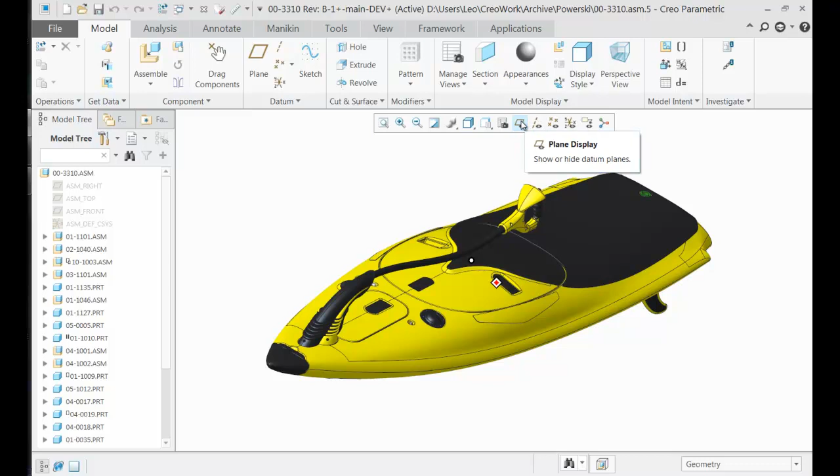Your skeleton is a modeling technique, which is great, but even then, if you don't have a handle on your layers, it's going to be difficult to manage the display—which is what we're talking about here for MBD—the display of pertinent data to the people who care about it. And so we all use these tools, which turn those things off: turn off the planes, turn off the axes, turn off the points, turn off the coordinate systems. And there's one more button that you probably leave off most of the time, and that's the annotation display button.

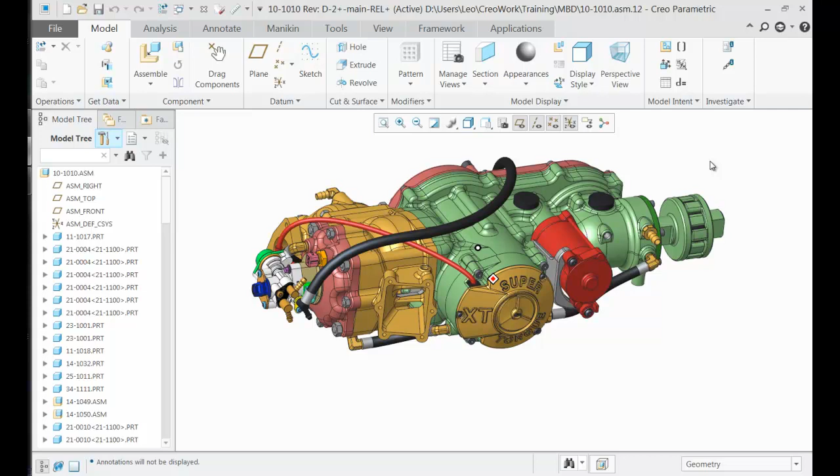One of the sub-assemblies in here is the engine. I was able to run every one of these parts and assemblies through a map key that would assign the appropriate entities, create the layers and assign the appropriate entities to all the layers, to where I could leave on the planes, the axes, and so on, and end up with a model tree at the assembly level that is reasonable.

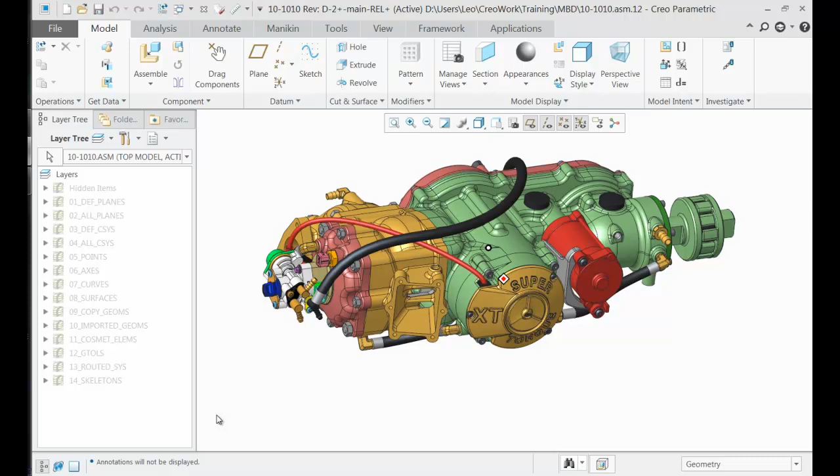That's number one. Get your layers under control to where they become useful.

Let's go down another level to the part level. So here is a part, and you'll recognize these annotations as holes—you probably saw them as holes before. That's the annotation that you guys have been using. When you place a hole, you get a free annotation, and you probably show them on your drawings right now. And we'll be using these, and luckily and happily, you won't need to delete them and recreate them to use them for your MBD.

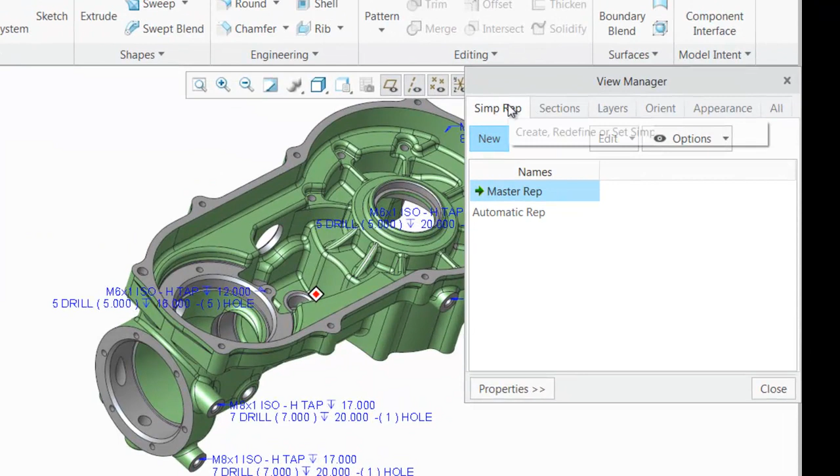We'll be talking about something called a combined state for the management of MBD. You've seen simplified rep management—that's where you manage your simplified reps, your parts and assemblies. You've seen your section management—that's where you manage your sections.

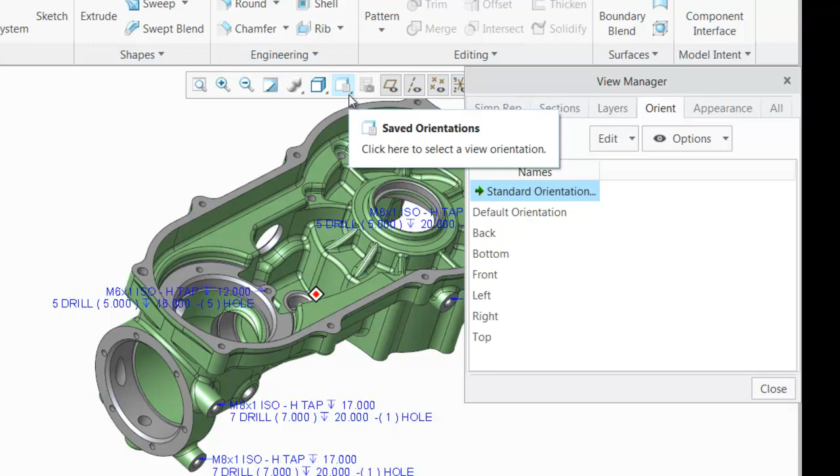There is also a Layer tab in the View Manager, an Orient tab in your Manager, an Appearance tab in your Manager, and an All tab in your Manager. You probably recognize on the Orient tab the views that you're commonly used to—those are the same views that are on the saved view, saved orientation drop-down that you used before: top, bottom, left, right, and so on. But you'll notice here that there is a Layers tab, an Appearance tab, and an All tab that you probably never mess with. So what are these things?

The All tab on your View Manager is the combo, or combination states. So let's make a combination state right now. We'll call this maybe 01_Annotations.

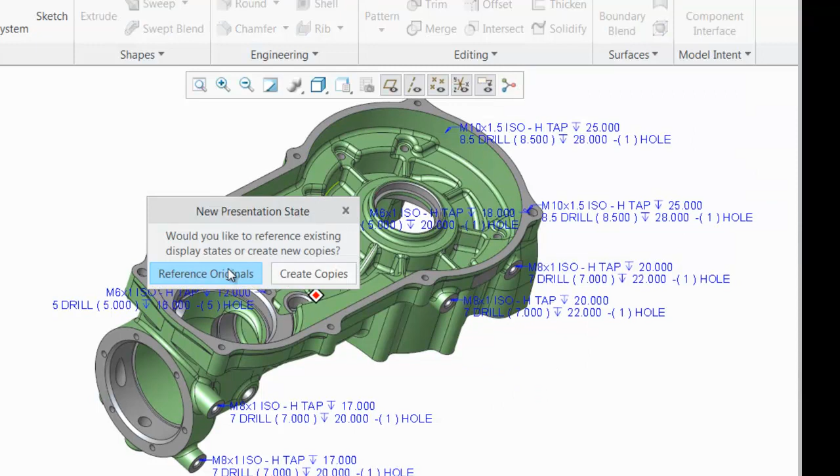We'll just go with the default for now. So now I've created a new combination state. It's on the All tab, I know, but it's a combination state, so get used to the terminology. And I close that - do you see a difference? Zero difference. Nothing's happened. Nothing at all.

So there's another thing you need to look at on the View Manager All tab. Down here you'll see Display Combined Views. And if you click this and turn it on - it's not on by default, but it can be with a config option - you'll notice underneath the main window there are tabs.

These are the tabs for your combination states. So, View Manager, All tab - you define your combo states, and then Display Combined Views shows the combo states, and those will then be shown at the bottom of your main window.

In Creo 4, you'll also have the choice of whether or not your combined views are shown as tabs or published. This is new in 4, where you get to choose. So you can have combination states that don't get published and combination states that don't have a tab.

When you publish a model that has combined states configured to publish, it creates a data set with a PVZ extension - that's the Creo View extension. The combined states are included in that data set.

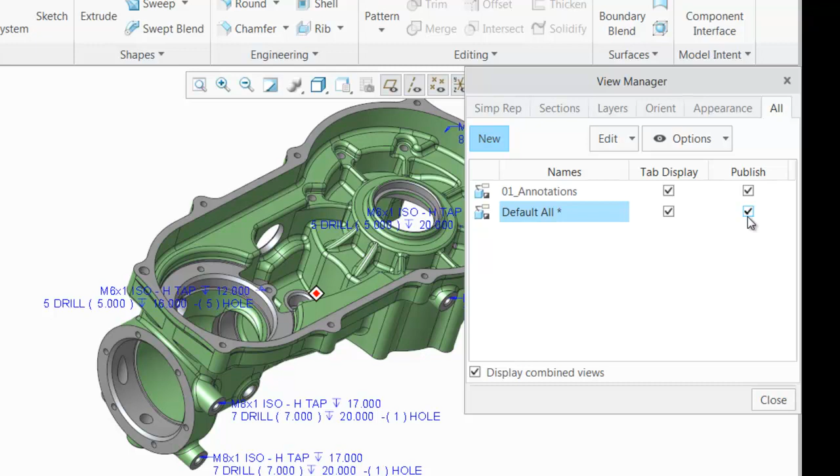All right. With Display Combined Views turned on, you'll notice there are tabs on the bottom here.

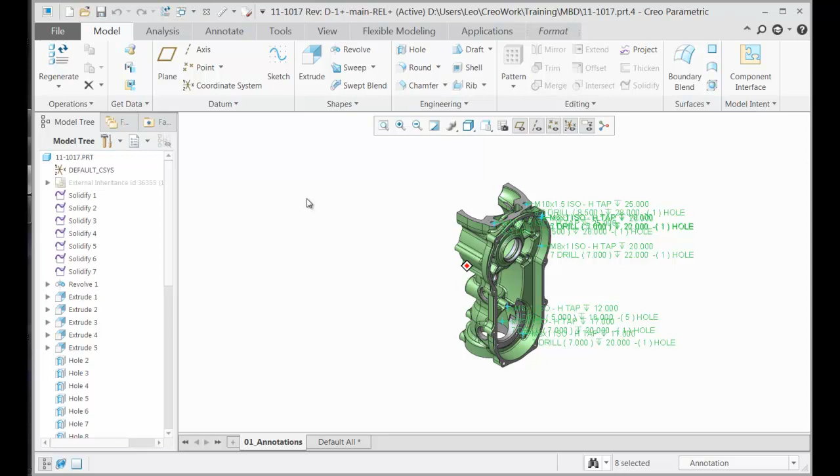When I'm on a combined state like I have here, I can change my filters to annotation and make a box and just grab them all. And if I right-click, hold, and assign - whoops, I have to be on the Annotate tab - then I can assign these annotations to this combined state.

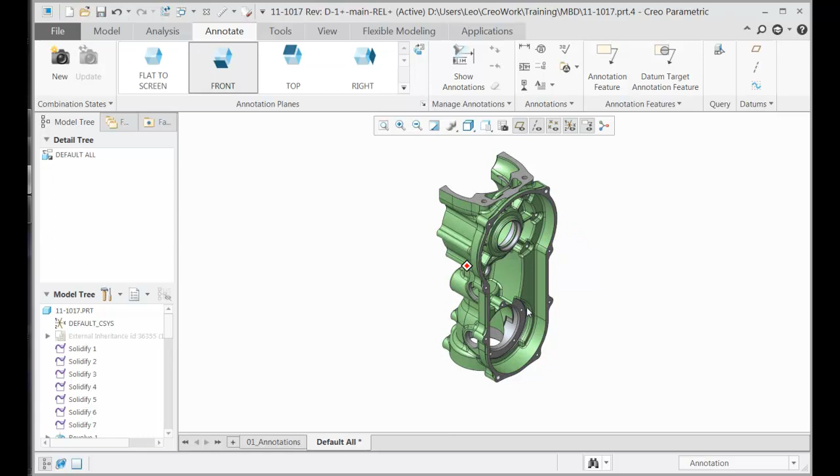Notice a lot of things changed here. Now what's the difference? So now when I go to the default all, notice that they're not there anymore. And the annotation tab does have them.

Something else I want to point out - when I go back to my assembly, it's kind of hard to say because there are so many other parts with holes in them, but they're not shown here any longer, you see. So that's cleaning up your subsequent assemblies very, very quickly.

You follow that? Now, a lot of you are currently hiding your holes, right? Just hide them, I don't want to see it - I might show it on the drawing, I might not. But this becomes an effective way to not have to hide them.

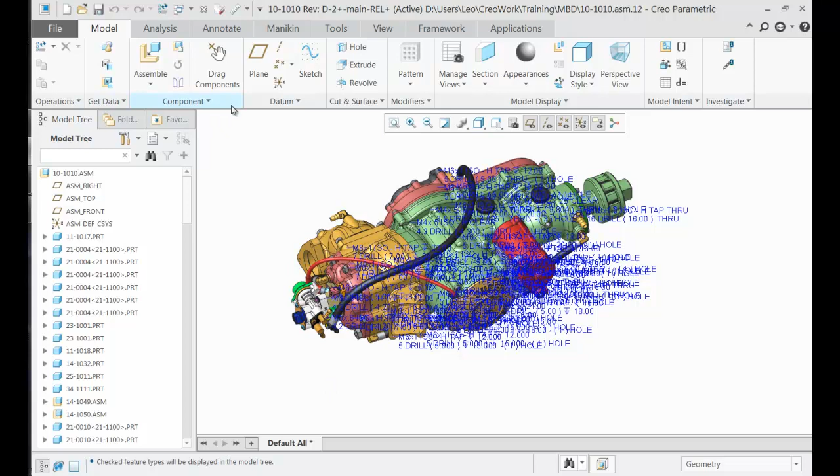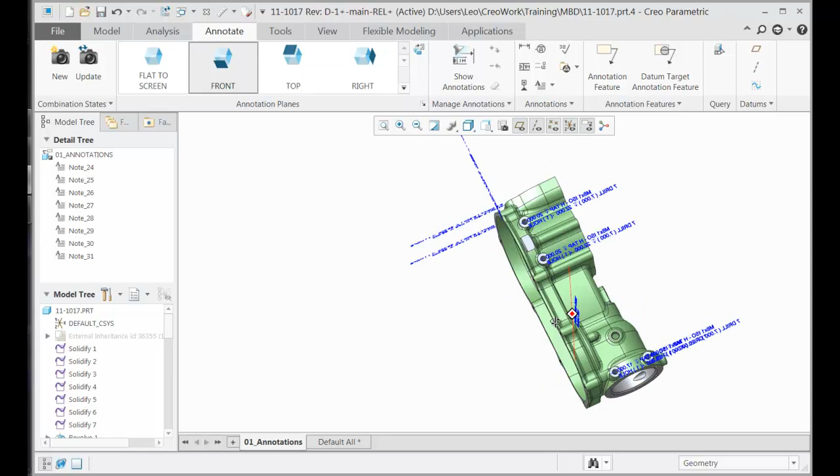Something else you'll notice is they're not floating and spinning around anymore. You notice that they now are on planes, because the hole has a reference plane that the hole is located on, and the note is then oriented with respect to that plane. This is an important aspect having to do with MBD.

File, Prepare, Model Properties. You guys go here to change what? Material, right? You go here to change material a lot. What else do you change here? Units, accuracy, right - all those things. At the bottom of this list...

You'll see detail options. Does that ring a bell? Where do you see detail options anywhere else? Drawing, right? And what does this look like? That's your drawing, what? DTL.

So yeah, this is where you're going to start to establish what you want your model-based definition annotations to look like - leader lines, arrowheads, offsets, text size, and the like.

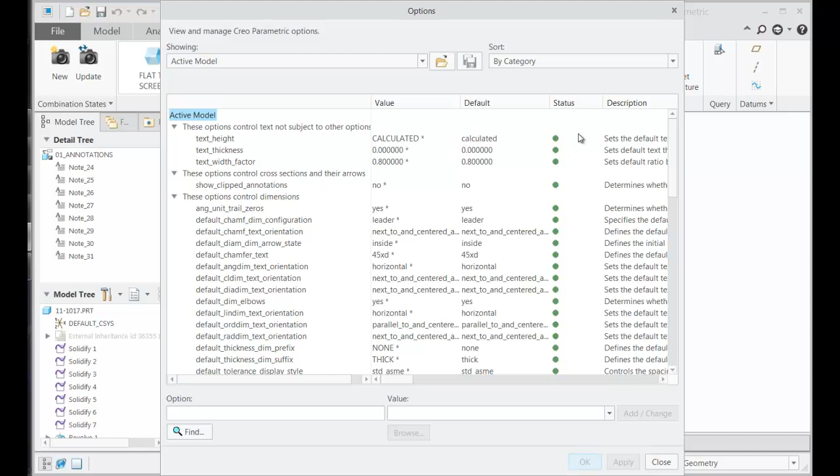And just like a DTL on a drawing, when does the DTL get accessed? On creation. So when you make a new drawing, the new drawing grabs your DTL and copies all that data into its own DTL. Changing your standard DTL doesn't affect your drawing from then on - you've got to affect that drawing, if you want to change it, in its own DTL.

Same thing applies here. So if your start part hasn't got a changed DTL in it, you'll be continually changing the DTLs - you with me on that? Because it doesn't access your standard DTL but once, on creation. And when you create a new part, when does it look?

When was that start part created? The start part or the start drawing? Start part. This is all part stuff, not drawing.

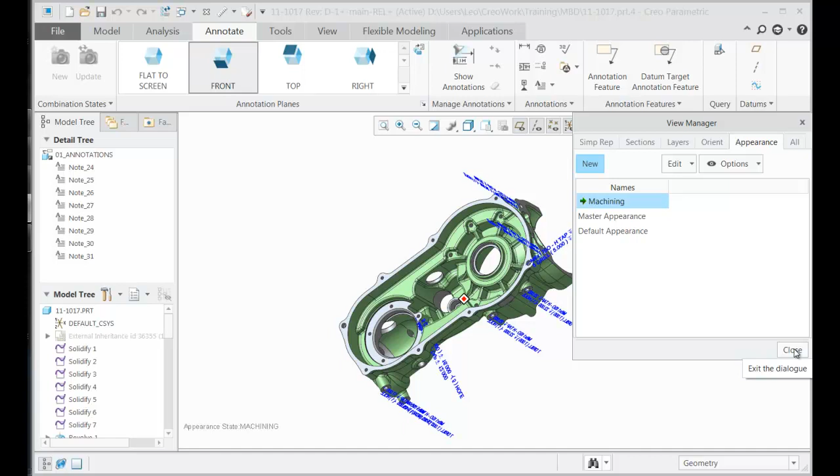Let's make a new appearance. We'll call it, well actually let's do it this way. Let's call it the machining appearance. Now what might we want to do to show a machining appearance? We might want to show the cut or manufacture, the cut surfaces, right?

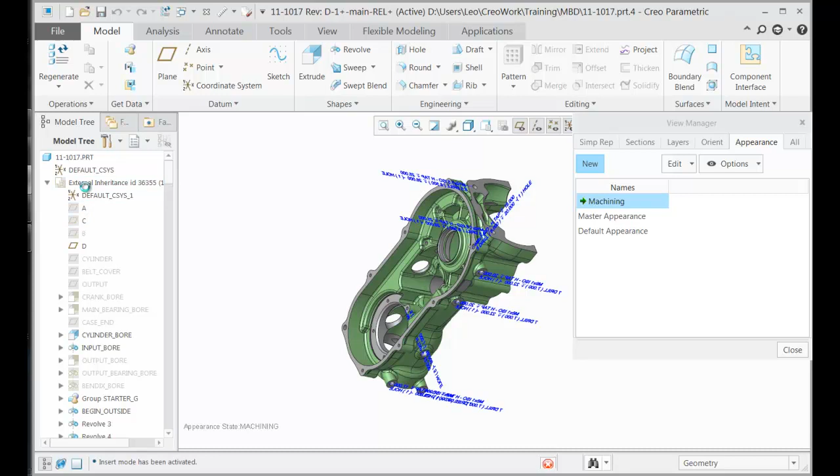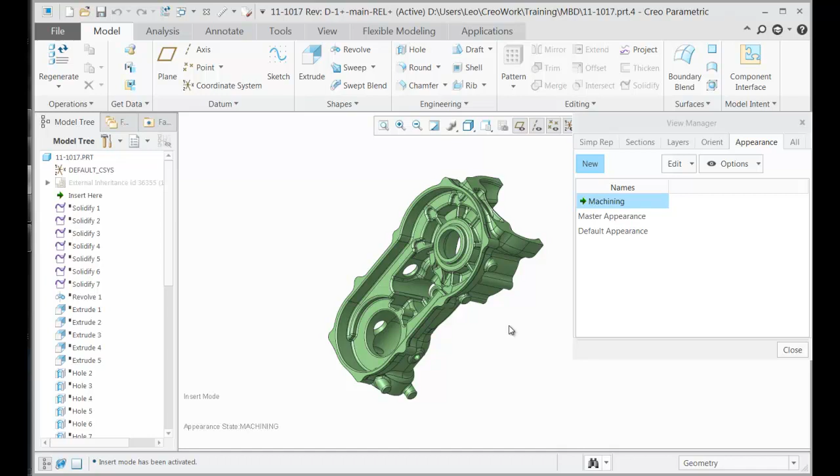Take the insert and move it all the way up to just after the first inheritance feature. Now the way this model was actually made is there is another model that drives it like a skeleton, and then this one is where the cuts are applied only. So that's what I have here, an inheritance feature that brings in the as-cast version. So this is as cast.

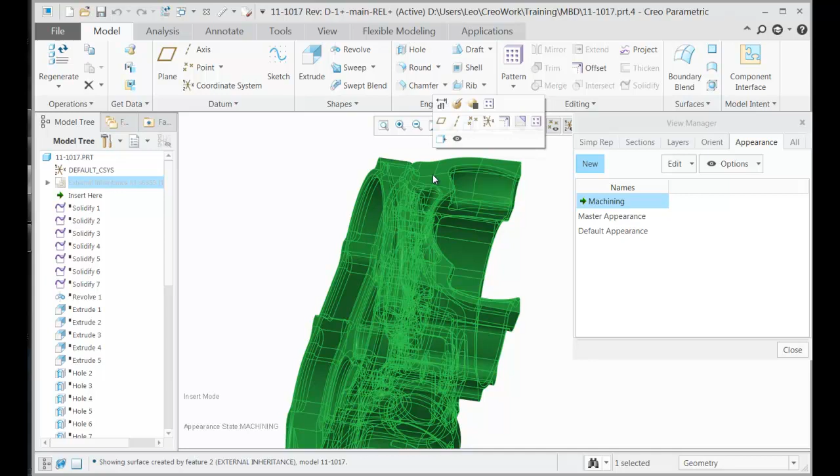If I pick a surface, hold the shift key down, move the mouse a little bit, click the same surface and release the shift key, that is the seed and boundary selection technique that picks all the surfaces of the entire model. So I've got all the surfaces, and if I go to my appearances and assign a glass appearance, now all the surfaces have a glass appearance.

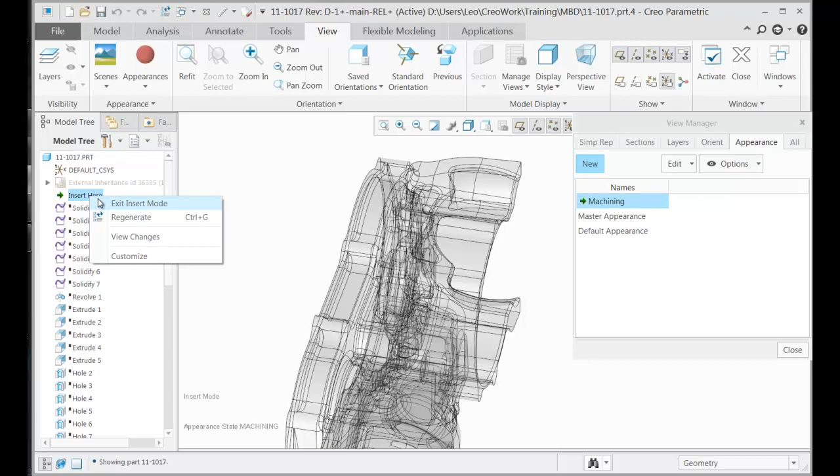And if I say choose red for the part, what happens now with every newly created surface, they get red.

So this would be a good way to show machined operations. Let's say you have a model that is mostly or entirely as-cast to a certain point, and then you have your machining operations after that. If you color all the surfaces before the machining operations occur, they automatically get the color of the model, whereas all the other surfaces get the one chosen, which is what we've done here.

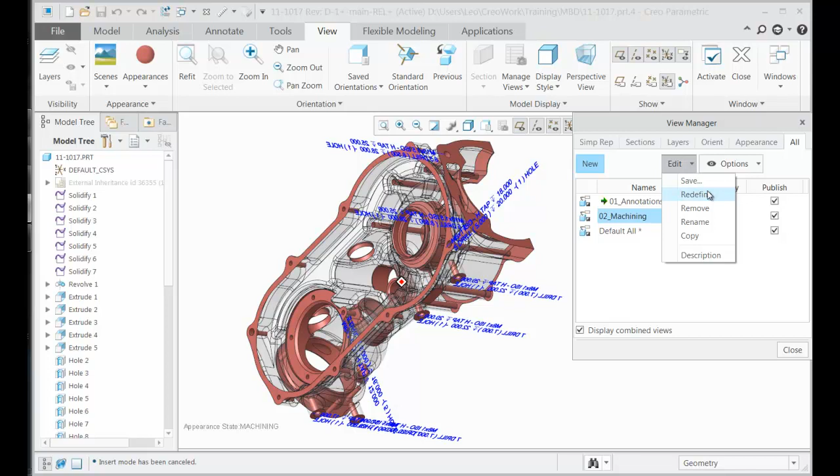So if I go to my All tab or my Combo State tab and make a new one, we'll call this one Machining. The tabs are alphanumeric sorted, so you might want to put a number in front of them. We'll reference the originals again, and then I'm going to edit the definition of this newly created combination state, or redefine it.

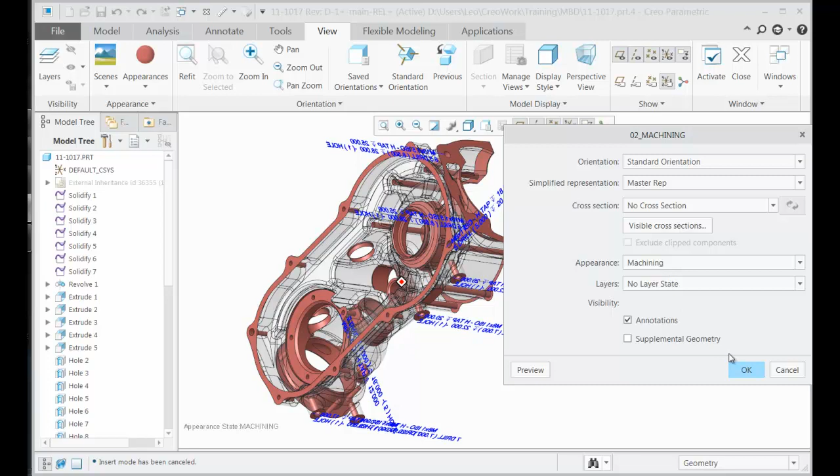So you'll notice here that you can assign to your combo states things associated with your orientation, representation, cross-section or not, and appearance. Notice here I can choose to have the machining appearance on this tab. So I now have an 02 machining, and if I go to my annotations, you see how it changes color.

And the annotations aren't shown here. Let's make another tab where we might call this one, let's make it say 03 underscore revision.

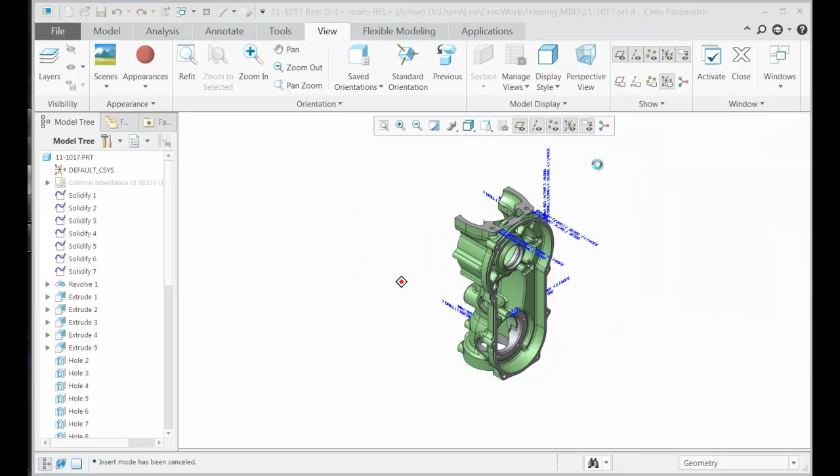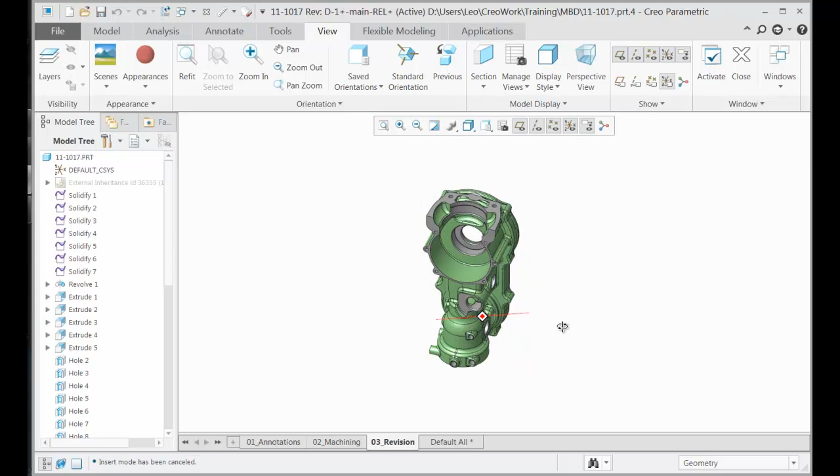And so what might you put in a combo state for revisions? Well, what changed in the last revision? You might want to put the dimensions of the thing that you changed. You might want to put the feature or highlight the feature that was just added in this latest revision. For example, what if we come up with an example? How about this? We might have moved this drain port.

This is for the oil to come out of this particular thing. So we'll change a view and we'll highlight this particular feature. What might be some of the ways that we could highlight it? One would be to create a zoomed up view of this. So let's look at that.

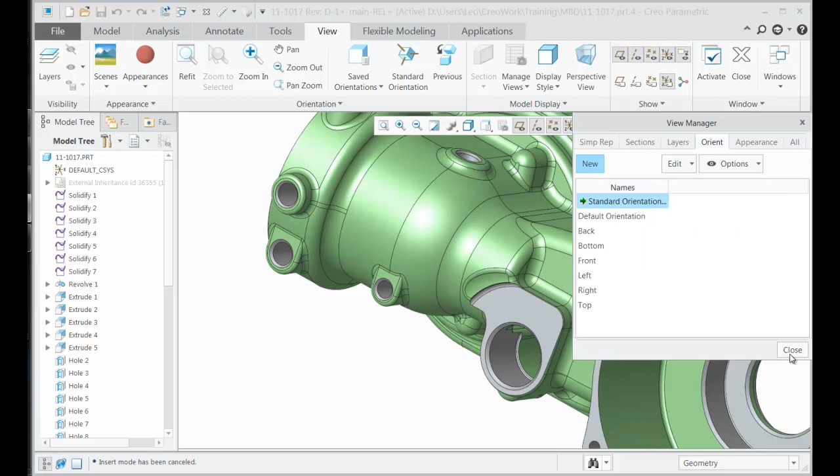Go to the orientation, or actually let's do it this way. You've done this before, where you've reoriented, and we'll call this maybe ISO revision. So if I go to my revision tab...

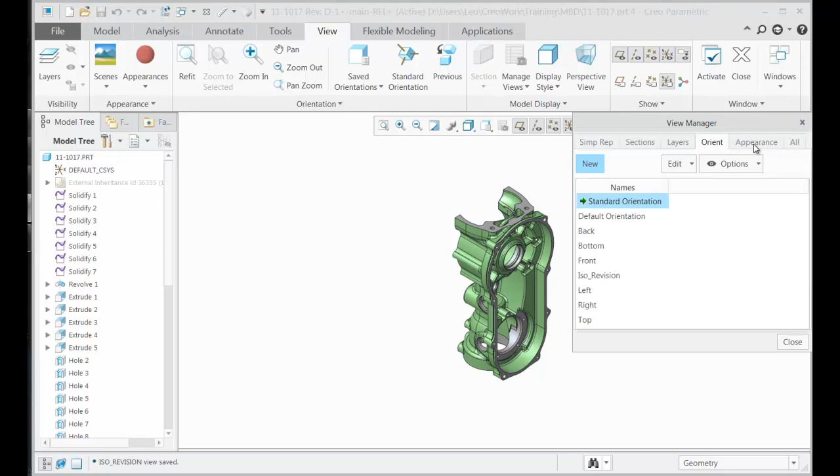I want it to come up to that revision view. Where do I set that? Alt tab revision, I want to redefine the orientation to be ISO revision. So now I've got a revision tab that highlights the revision. And of course I might want to do an appearance that puts some colors on it or what have you.

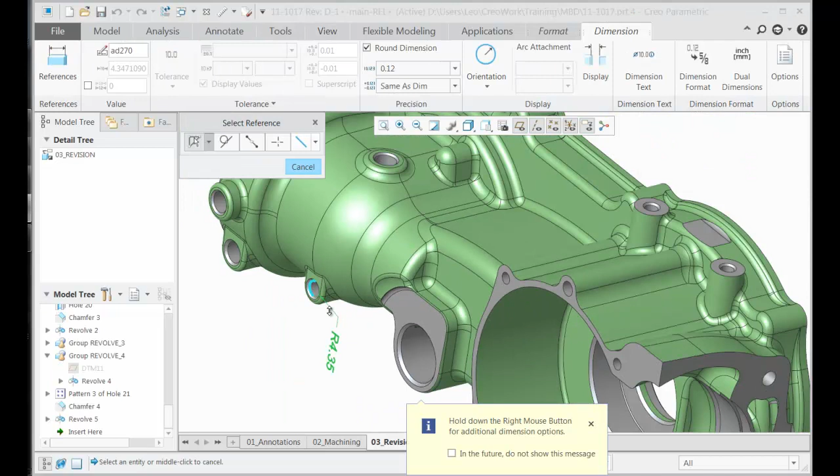I also might want to show dimensions. Okay, so this is a way to get a dimension on there. There's lots of ways to change its orientation for presentation purposes and so on.

So now when I go to my machining tab, it looks like that. When I go to my annotations tab, it looks like that. When I go to my revision tab, it looks like that, zoomed up, showing the dimension. What else might I want on here?

Now what if I put a note on the left plane? It would be on the left plane, but what if I put this note flat to screen? What kind of behavior do I get then? Check this out. If I say give me a note, and I put it right here, and I could type revision description, or what about rev space ampersand PRO_I underscore revision. Those of you who are familiar with Intralink know that that is the revision parameter name.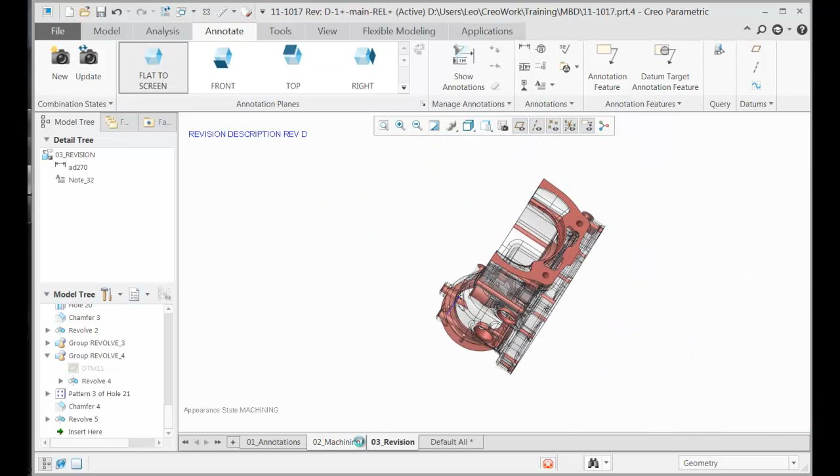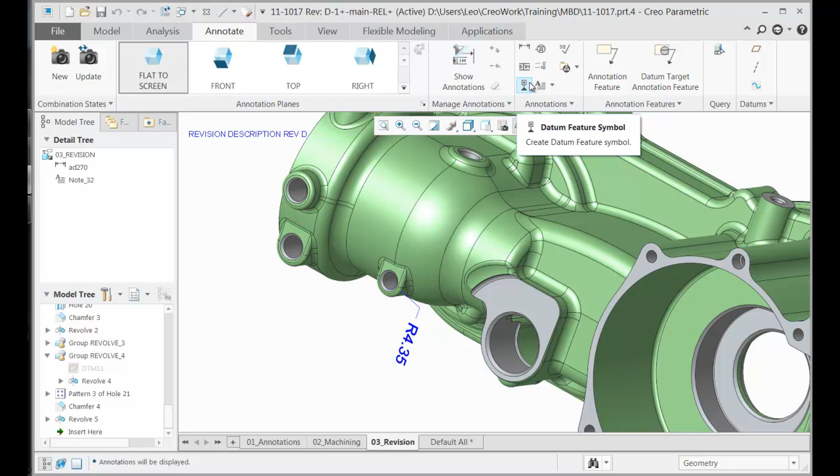So what do I have now? I got a note that's always in view, regardless of how I spin, and it's only on the revision tab. Okay, so let me show you something else. You just saw me place a note, dimensions, they're over here. What about geometric tolerances, datum planes? And so you see, you can do all the things, all the joy that you have in creating drawings right now. You have that same joy at the model level now.

Who's done symbols on their drawings? The very same symbols are available right here at the model. And so I made a symbol that I think you'll find useful. Let's say the revision symbol. Watch this. So things that you do commonly, and you can dress them up a little bit. You see I put a little box on it, and all the stuff that you do with a symbol right now is the same thing. And this would be a symbol applied flat to screen. A symbol can also be applied to any of your views, too.

And so you can think of a combination state as a view. You can think of it that way. And I know that some people make combo states for every view that they would have made on a drawing, which is fine. I think that's pretty clear. And then each combo state would have a view orientation appropriate for that particular view. I don't know if that's actually necessary because each combo state is spinnable. And so you may want to put all your inspection dimensions in one combo state and all your manufacturing definition in another combo state, and just allow the operator, the consumer of this information, to spin it to the orientation that they find most agreeable.

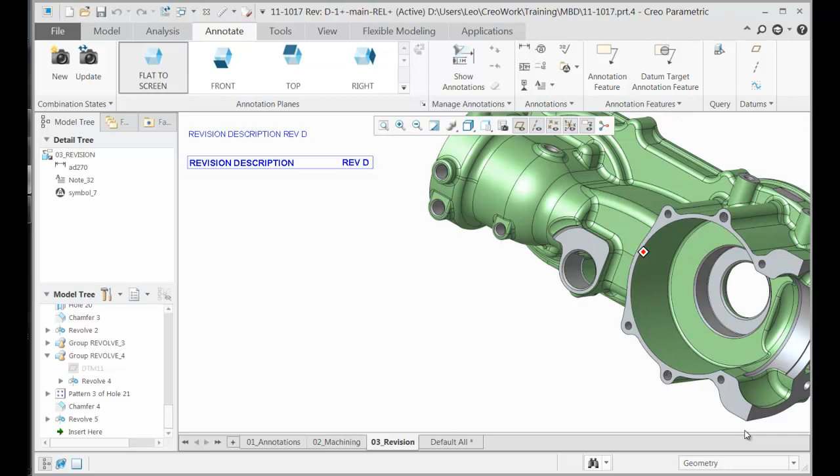Now, these symbols can include variable text, so they can interrogate your model for parameters to pull in information that's required. Keep in mind, though, before you go crazy with this, you know how on your drawing, in your title block, you have description, model name, material, tolerance information. What else do you put? Heat treat, finish. Okay, so those kinds of things are going to be in your title block, and you may consider making a symbol to extract all that stuff to make it just like your title block in one of your combination states. Nothing wrong with that. But keep in mind that all that information is already available in the parameters, which are included when you publish to the PVZ.

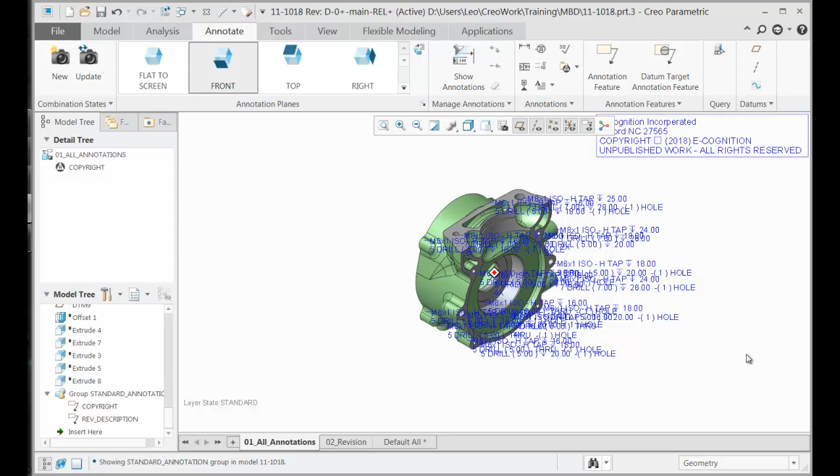So yes, it's a big paradigm shift. Where do you find this information? Do I need to find it in the title block on a drawing? No, it can be in your model-based definition. Okay, so this is kind of an introduction to what this might be. I hope a little of this made sense for you. We're talking about the Creo Parametric aspect of model-based definition. The consumers of this information are wide and varied. You may not even know where it goes from here, just like you don't know what your drawings are used for today. Your drawings are used in ways that you probably never would imagine.